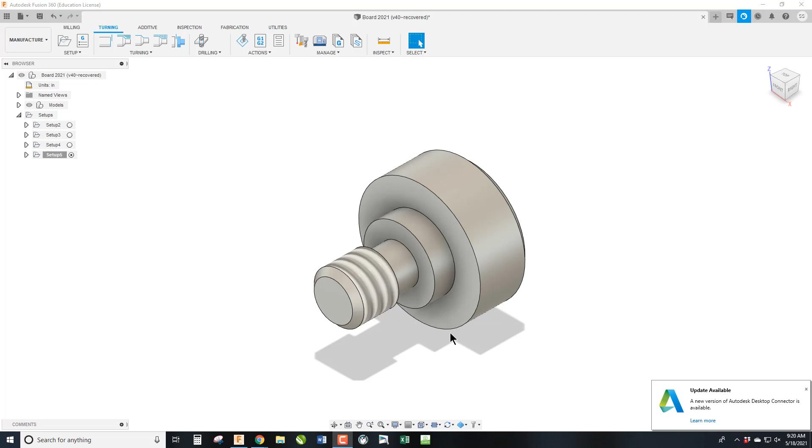Okay, so we have the foot. We've already switched into the manufacturing workspace. We need to make sure we've already downloaded the ST10 tool library, which has a general facing turning tool, a parting tool, an OD threading tool, and then we are not going to use tools 4 and 5 for this project, so we only need those first 3. So if we have that loaded, our first thing is going to be setup. So we go ahead and select the setup.

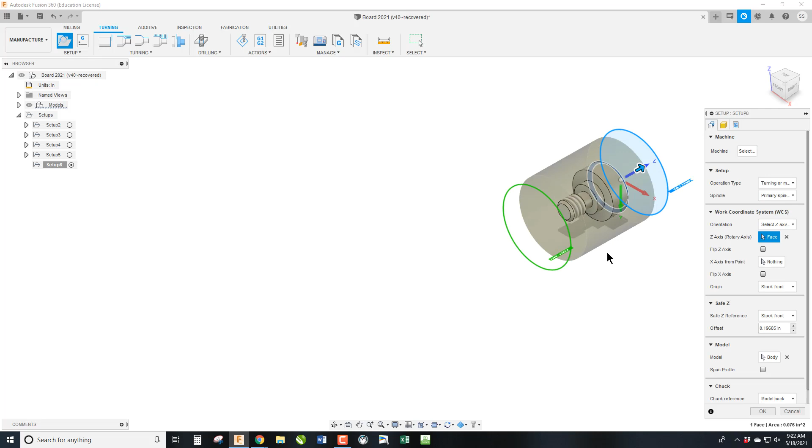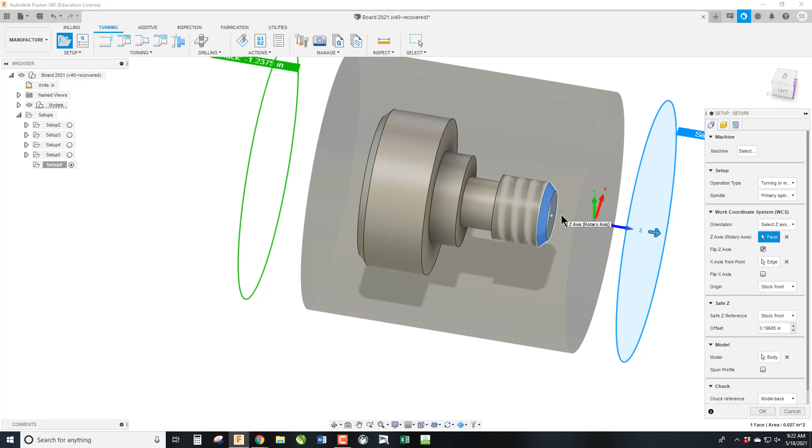The part is going to be in the lathe like this, where our Z positive is to the right, our Z negative is to the left. So our origin's completely in the wrong place. So I'm going to check the Z plane here. Oops, let's cancel that and let's go right there. And then we're going to flip Z. That'll bring it around to this side. The X, because it's round, doesn't really matter. We are going to select the body, which is that. It already selected that. There we go. And the chuck reference we will come back to in a minute.

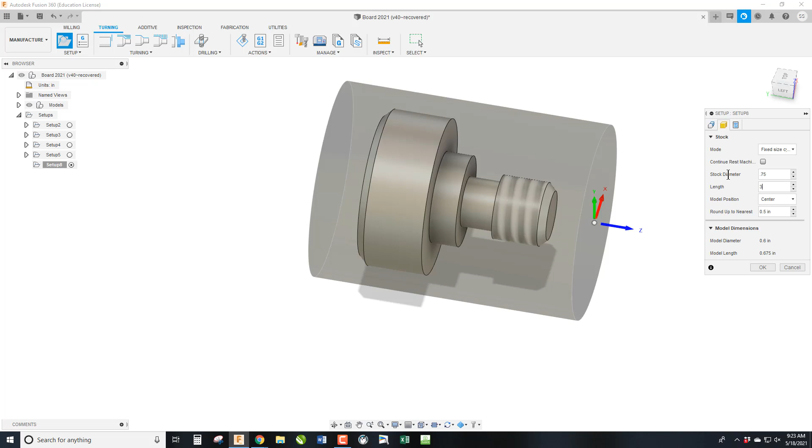So our stock is going to be a fixed size cylinder. It is going to be 0.75 in diameter. And its length will be 3 inches. And its offset is from the front. We want to offset it like 0.02, so it's just barely inside the material. Now we have it set to 0.02 off the front.

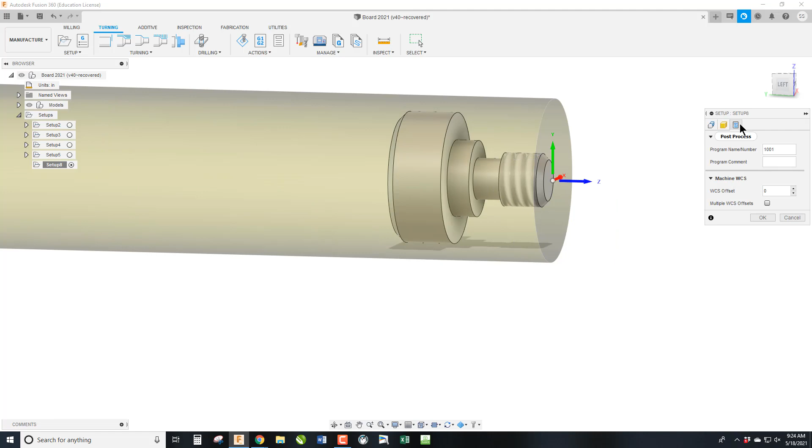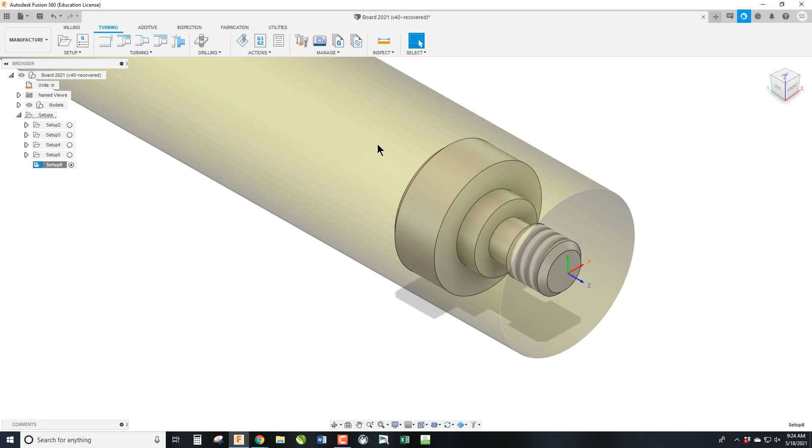Our last step is we do not worry about work offsets in lathes. We just put in our number here, which has to do with our birthday. And we click OK. So now we have the setup done. Our next step is going to be to get our first operation, which will be a facing operation. So we go ahead and click facing. We are going to select our tool, which is going to be our general facing turning tool, tool number 1. We are going to just pretty much come across and hit OK. And it should make a nice facing pass, which you see it does right there.

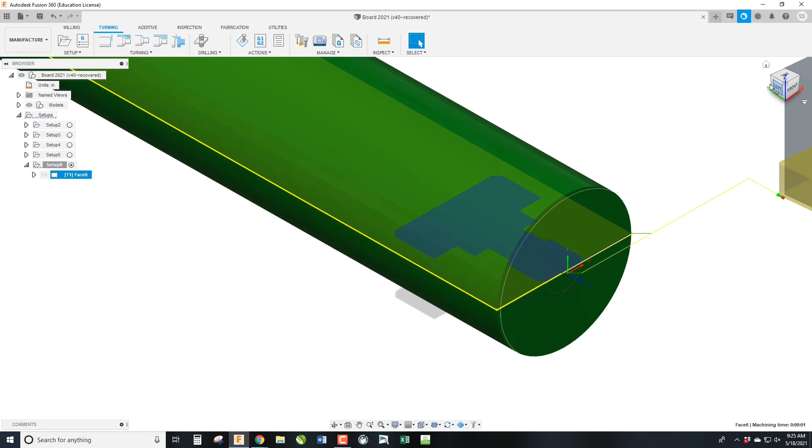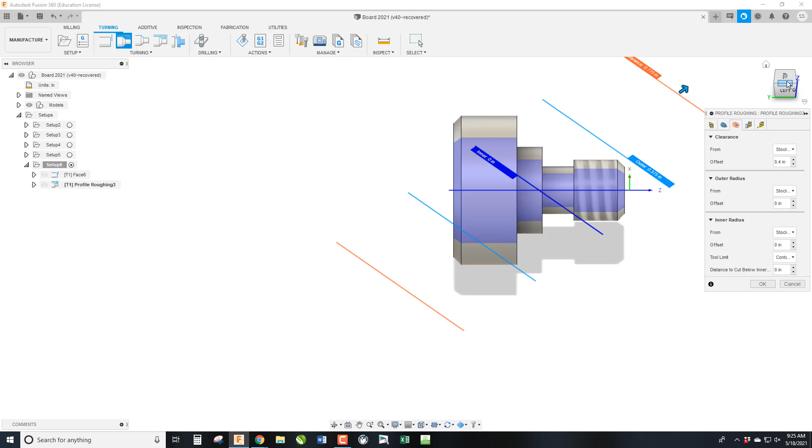Now, our next step is we need to do a general material removal by getting rid of all this stock. So we are going to do a roughing. We are going to let it select the same tool. We are going to go to geometry, and there's the geometry. It's showing us the clearances. We are just going to click OK and see how this comes out. And there is our removal of most of the material. We are going to do a cleanup pass, which will be our next step. So we'll do finish profiling.

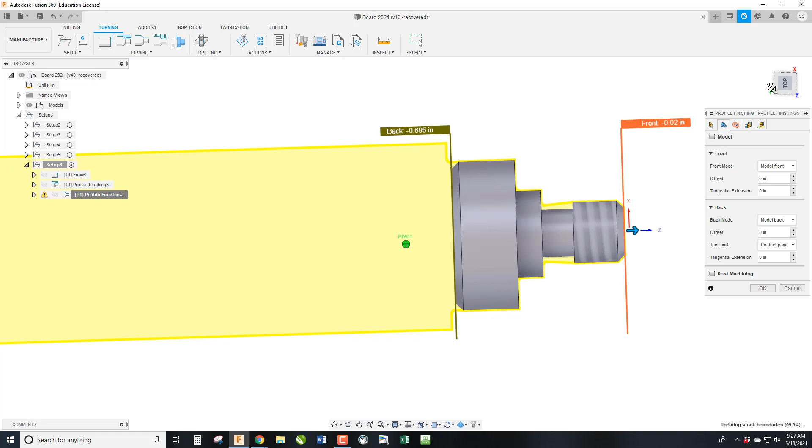Now, under geometry, we need to actually change the back of the model because our problem has to do with this chamfer. So we are going to go from back to selected, and we are going to select that ring and click OK. We also need to change the lead in and lead out from 45 to 90 degrees so we don't get an error. So we now have our facing, our rough turning, and our finish turning of our part.

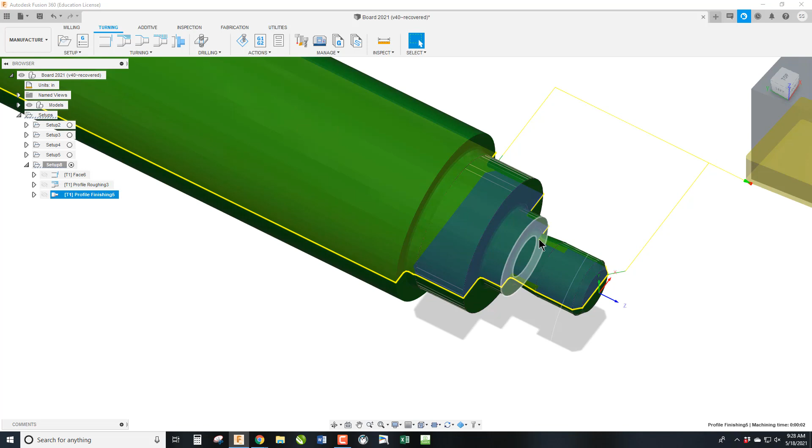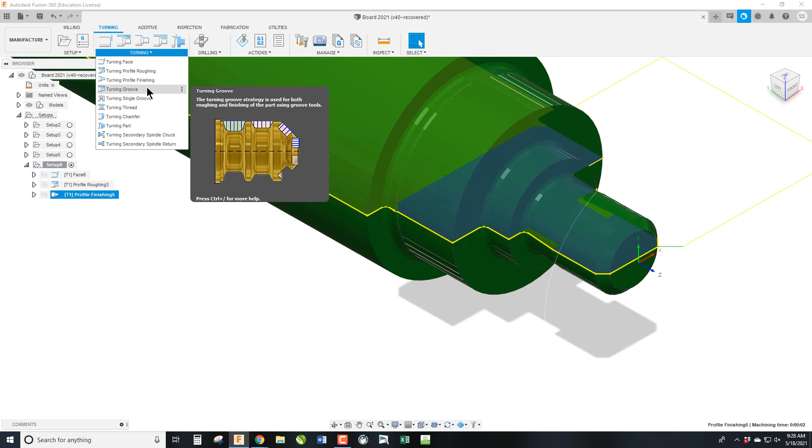So the next thing we have to do is cut this relief groove. And you will notice also, because our cutter has a small radius on the tip, there's a radius being presented here and here. To eliminate that, we are going to use our parting tool to come in and clean up that little edge. So let's go ahead and do that. We are going to do a single groove. There we go. We are going to select this edge here and this edge here.

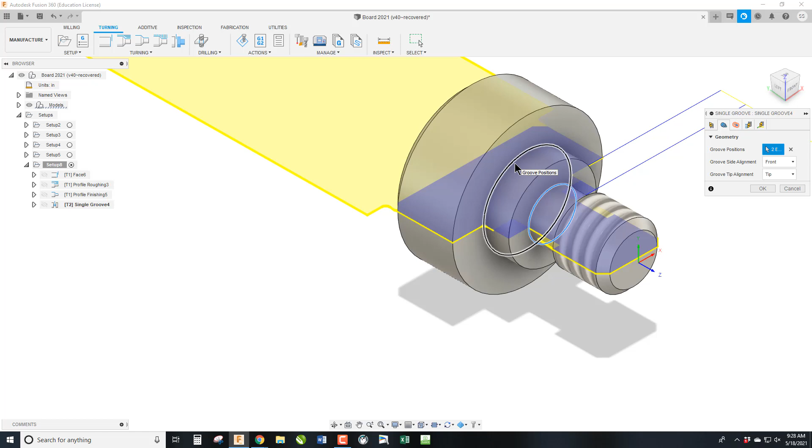We have to change to our parting tool, which is tool number 2. I should have done this first. And then we need to come across to middle. We want to do it from the front side because that is where we selected the contour. And if we click OK, it will give us a nice 90 degrees as well as that relief there, so that when we thread, our threading tool has somewhere to stop. So that's done. Next step is threading.

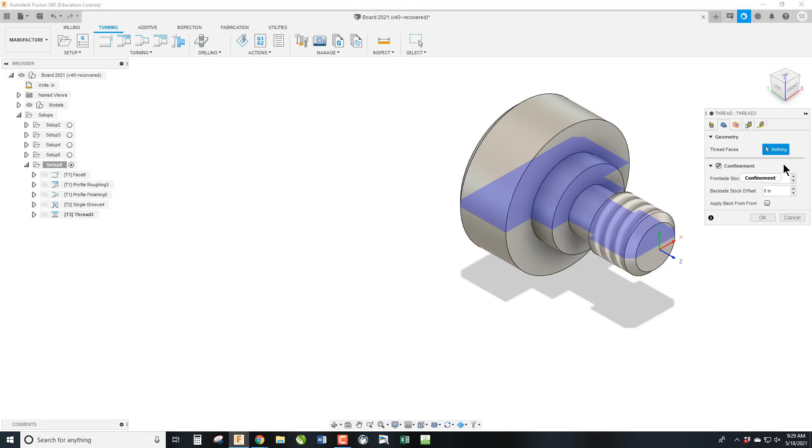So let's go in here and go to threading. This will require a bit of math. We are going to have to switch to our threading tool, which is the OD outside diameter threading tool. We're going to select that. We're then going to go to geometry and select this face where the threading occurs. Let me flip it over so we can see it. How much are we going to start at the beginning? 0.2 is probably more than we need, but we do need to add a little bit to the back. I'm going to do 0.05, and I'll tell you why 0.05 in a minute.

Now we come across to radius, stock, offset, all that should be fine. Okay, so now we need to do a little bit of math in order to figure out the thread depth, the number of step downs, the pitch, and all of that.

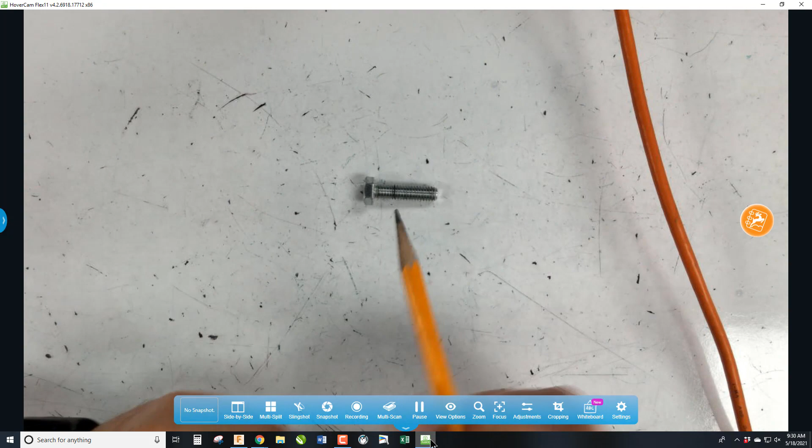Okay, the threading we are doing is going to be a 1/4-20 thread. So really quickly, 1/4 translates to 0.25 diameter. That's the outside diameter of the threads, and 20 represents 20 TPI, or threads per inch.

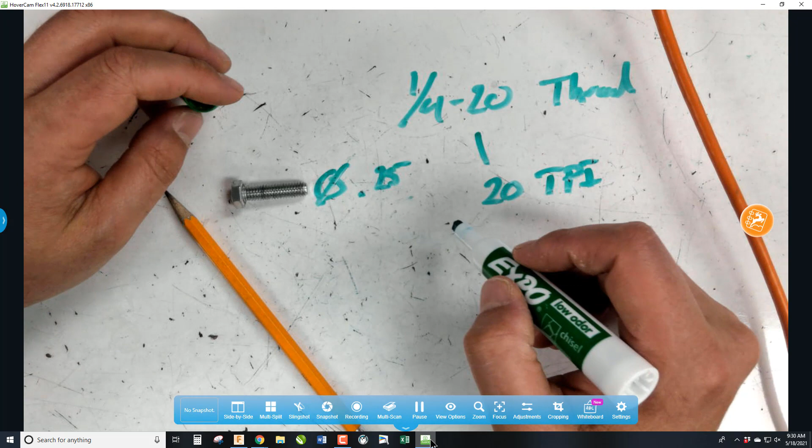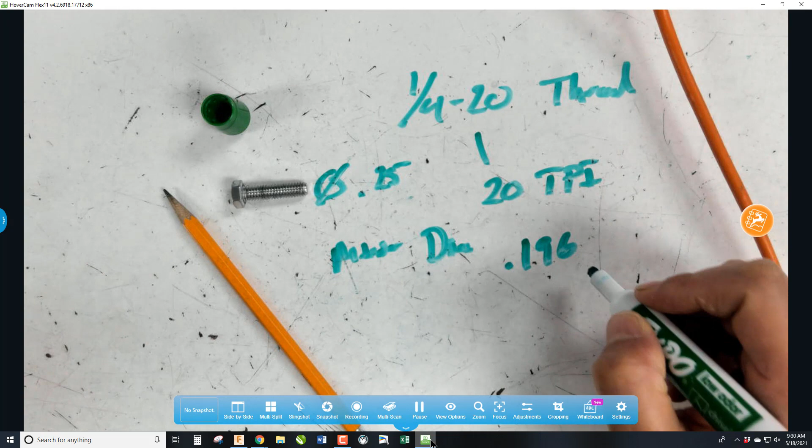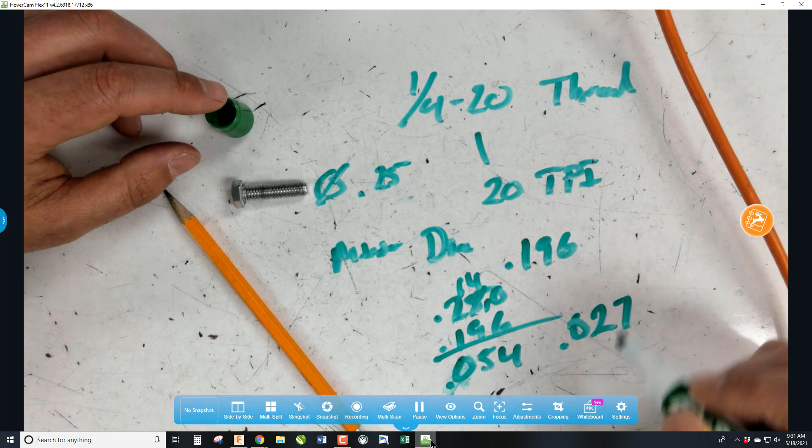Now, the first thing we have to figure out is what is the minor diameter of a 1/4-20 thread. And I believe it is 0.196, which you can look up in a reference book or on the internet under minor diameter. So we're going to take 0.25 minus 0.196, and that is 0.054. So we have to divide 54 thousandths in half. That comes out to 27 thousandths of an inch, which will be the depth of our thread.

So if we jump back over to Fusion, this thread depth, which is done in radius, is 0.027. Normally, I want this to be about 5 thousandths per pass. So 5 times 5 in this case is 25 thousandths, which is very close to 27. So we're going to leave it at 5 step downs.

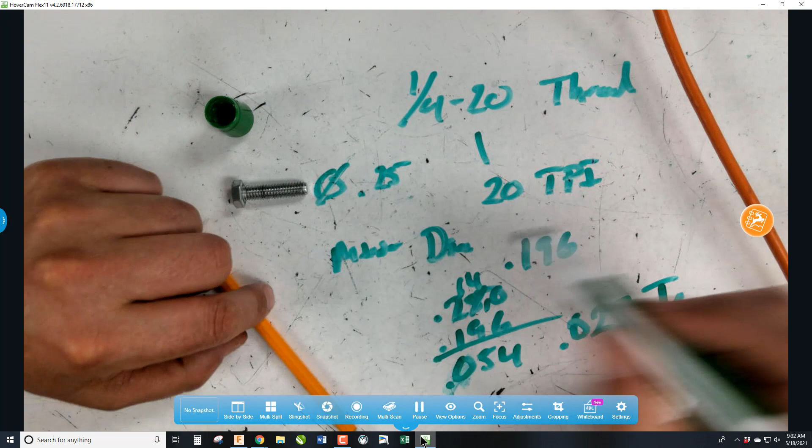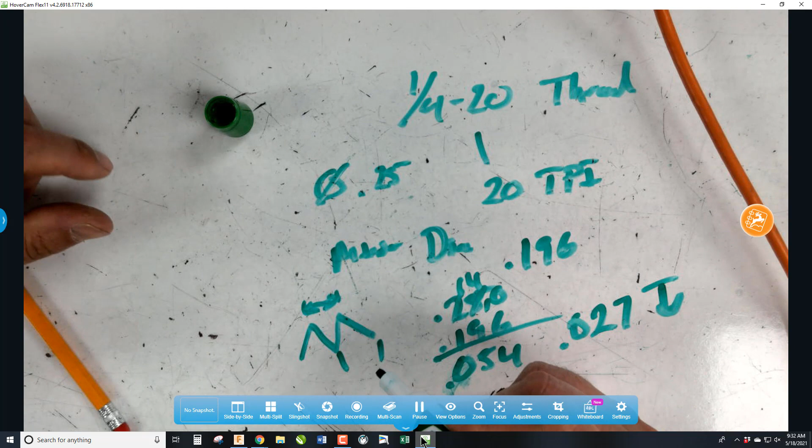So the next thing we need to do is thread pitch. Pitch on this thread, if you have the V's, the pitch is from the top of one V to the top of the other, this distance. Or the bottom of one V to the bottom of the other, they should be the same. Now, so how do we get the pitch? Let me erase this so we can get some space.

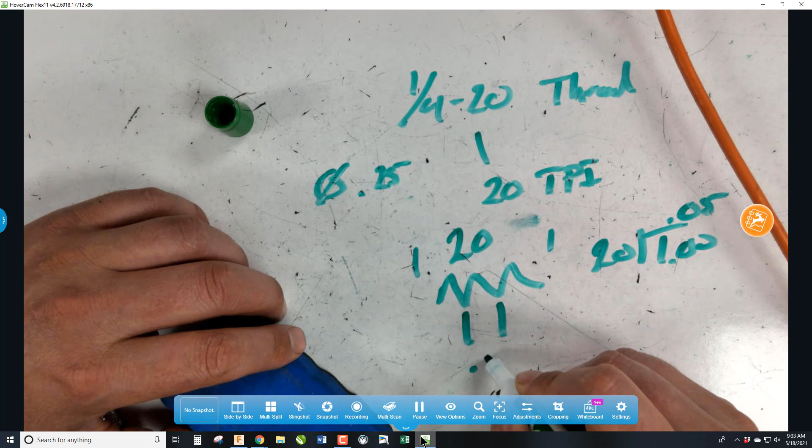There are 20 ridges in 1 inch. So we take essentially 1 divided by 20, and it works out to 0.05. So the pitch, the distance from one ridge to the other, or one valley bottom to the other valley bottom, is 0.05 inches. So if we come back over here, our pitch is 0.05.

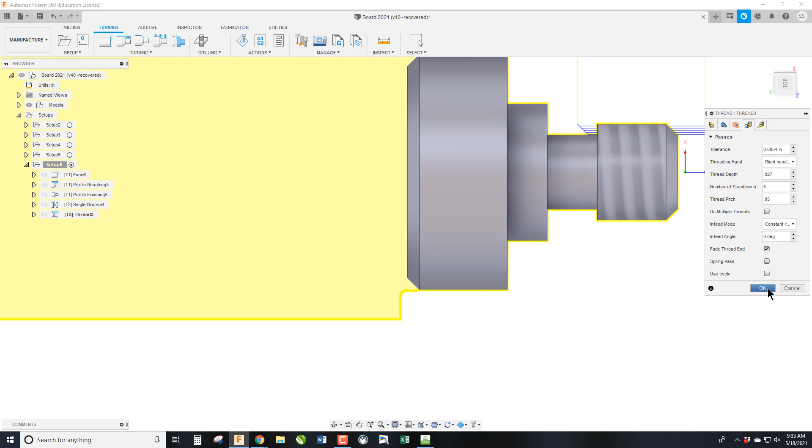Now, if you mess this one up, your threads won't be deep enough and it won't screw in. If you mess up the pitch, you will not get the right number of threads per inch and it won't screw in. So this is a very important table. But now we are done. And a lot of this, once you learn the common sizes, becomes very, very easy. And we click OK. So we now have this done.

So our last step is to do this backside chamfer and part it off. For that, we're going to use the parting off tool. Let's get it around to a place where we can see. We don't want to do the backside chamfer, but we want to do this edge break. Now, this edge break has to do with moving it back, and I have pre-calculated this for us. For our tool to do an edge break, we want to do 0.1, 0.05, and that will give us the proper edge break that we want, and we click OK.

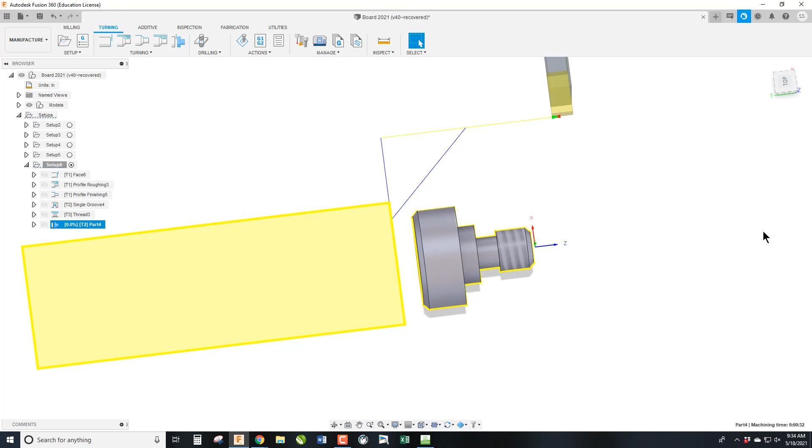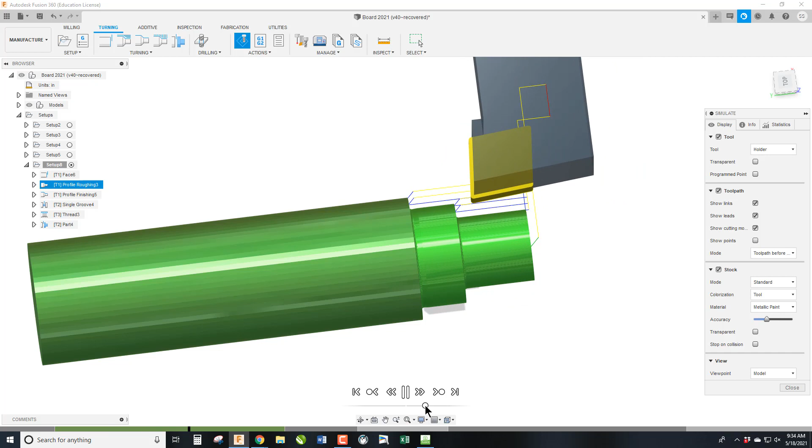And what you will see is when we simulate this, which I will slow down. Well, that's a little too slow. There we go, the facing, turning. Now it's going to do the profile roughing. The finish pass. So now we're going to come in and clean up our groove, then clean up that corner, come in and do our threading.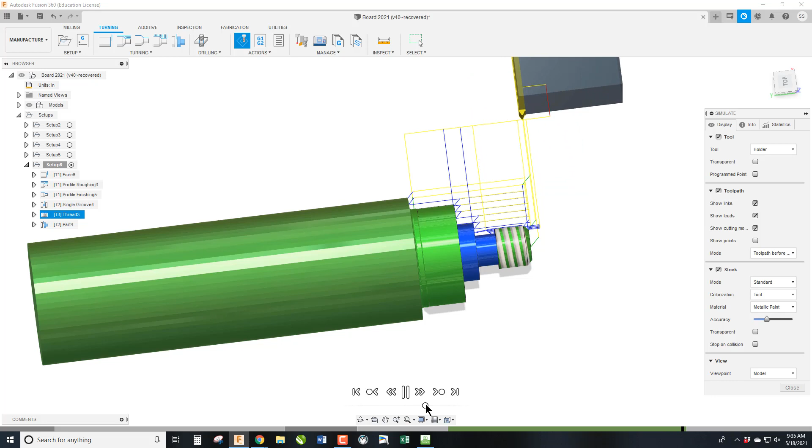And now come in and do our parting off. So it gives a starting part off, then comes in at an angle, cleans up our edge and falls off. Now the only thing we need to add is some manual inputs, because on the lathe we need to control chips. We need to get the chips out of here, mainly because when we actually part it off, this is going to fall on the bottom of the lathe and we need to find it. We don't want to have to be digging through chips for it.

So we are going to do a manual NC. Our first one's going to be start the chip transport, which in our case is a chip conveyor. We click OK. It's going to put it at the end. I'm going to drag it to underneath the facing. No point in starting to move chips if we haven't actually made chips off the part yet. Then we do another manual NC, stop chip conveyor. And this one we slide right in front of the parting so that our part doesn't get carried away in the chip conveyor. It'll fall down and the chip conveyor is no longer running.

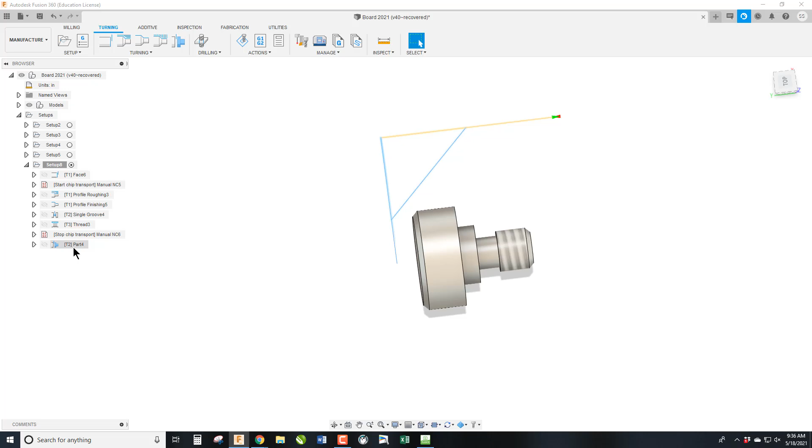So once this is done and it looks good, which we already simulated, we can go ahead and post-process. We're choosing an ST10 from this list. We are putting down our number, our name, and we hit post. And there is the lathe code for the foot project. You'll go out and run it on the simulator and then see me about running it on the machine.